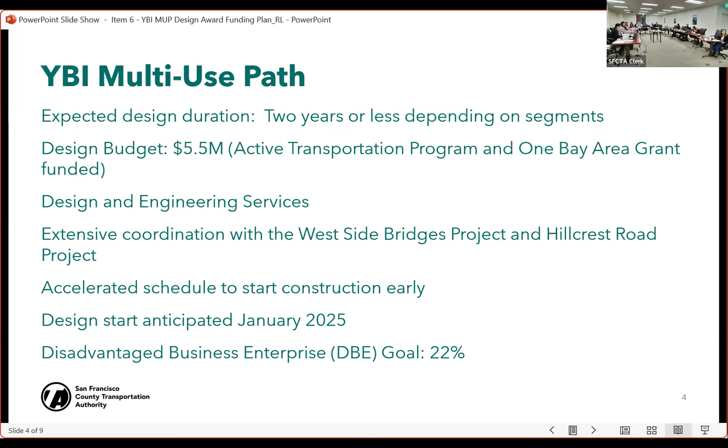Let me just talk a little bit more about the project limit. In the earlier slide, the map, I mentioned that the multi-use path is on the peripheral adjacent to several projects, and here is the actual breakdown.

Segment 1 is from the existing bike landing to Forest Road. That is where the Southgate project is, shown on the top photo rendering. We've got a spiral loop. We may have a different design - it may be a viaduct structure or it may be a switchback. When we get to the design phase, we'll have a better idea. There's a lot of engineering challenges out there that we have to take into consideration.

Segment 2 is from Forest Road to Treasure Island Road. This is where the Hillcrest project is right now, under construction. Segment 3 is along Treasure Island Road, where West Side Bridges is also under construction. Segment 4 is from the West Side Bridge limit to the Macalla Road intersection, and that's the bottom photo - a rendering of what this Class 1 multi-use path can look like.

Let me talk a little bit more about the procurement process. We issued a request for proposals on June 18th this year. By the due date of July 19th, we received 2 proposals. We conducted interviews during the week of August 5th. The RFP allows us to actually award either the whole contract or split the award into different segments.

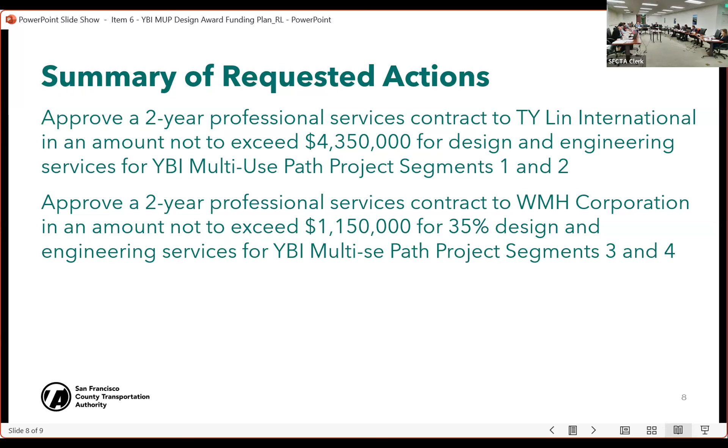We have other projects going on in Yerba Buena Island. Is there any chance you can show the whole project - what's the total budget, how much we've spent, what is the status of construction going on? Throughout the year we see pieces from time to time, but it'll be great to see the whole picture. Projects like the Macalla Road reconstruction, Yerba Buena multi-use path, Forest Road detours - all the transportation improvement projects. It would let us see the whole picture, the total budget, how much we've spent, and how much we plan to spend, so we can understand the whole picture.

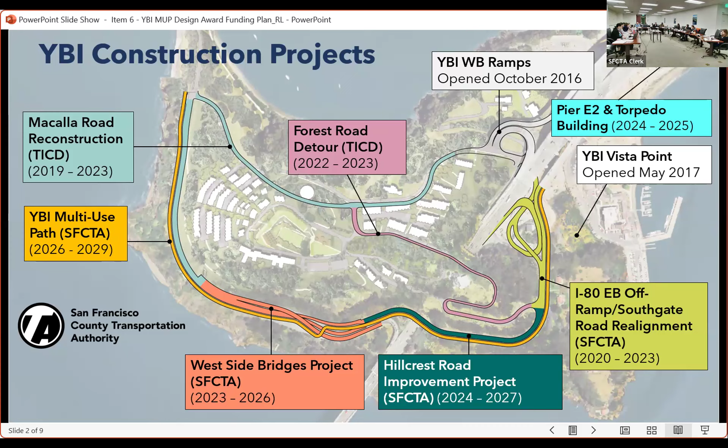Just to recap: yes, this is a Class 1 bike facility, a multi-use path. But more critically, this is a project to truly widen the road in a place that's very hard to build, in order to create that multi-use path and the transit-only lane. It's also a project to build a whole brand new structure that doesn't exist today, making it more user friendly. Did I recap that effectively? Yes. Okay, great, that helps a lot when you put it in that light.

Thank you. So now my second question, which might be for Anna Laporte: I looked at the anticipated funding sources for this, and I think it says $25 million is TBD. So what's the level of confidence that TBD is going to come together?

Thank you for that question. We have several grant applications that are either pending or being written literally right now. We have a pending application for an Active Transportation Program grant, but the funding in that state program has been significantly reduced, such that the $25 million we applied for—we're not as optimistic as we were that we'll secure that funding, because of changes in the budget for that program in this particular cycle.

But we will be applying, for example, for a RAISE grant, and that call for projects should be coming up soon. We're also preparing an application for SB1 Solutions for Congested Corridors for the full Bay Skyway project, including the West Oakland Link, the multi-use path, and ferry components. We also have a pending grant application for RM3 funds, about 23 million total, with about 17 million to be used for this particular project. So there are a lot of applications out there, and we are very confident about the funding for construction.

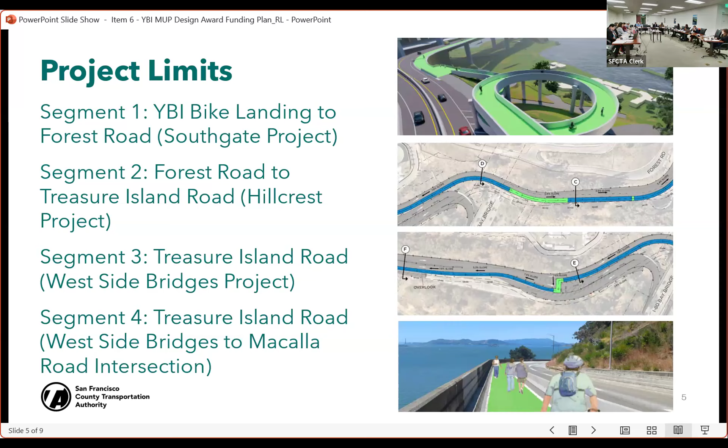Thank you, Edward Mason. I think what needs to be questioned is what is the projected bicycle usage of this? I remember in prior meetings it was said we're going to bicycle ride from Oakland to Treasure Island, over to Yerba Buena Island, and down the other side to catch the ferry into San Francisco. That's what was always said. My question is, how many people are actually going to show up for this, given the cost?

Why are the developers not paying for this? Lennar and the other companies developing there, we're having to pay the freight on this development, whether that's part of the local code to do it. Because when the Navy said, oh, here, we're going to give this to you for free, I remember vividly seeing all the politicians lined up with San Francisco in the background, down there at Building 1, clapping and everything, and not acknowledging the cost we are now incurring for all the infrastructure that is there. So the question is, why are the developers not paying the freight on some of this? It just baffles me as to how we allow this to occur.

Thank you. Is there any remote public comment on this item? Checking for public comments. And there is none. Thank you.

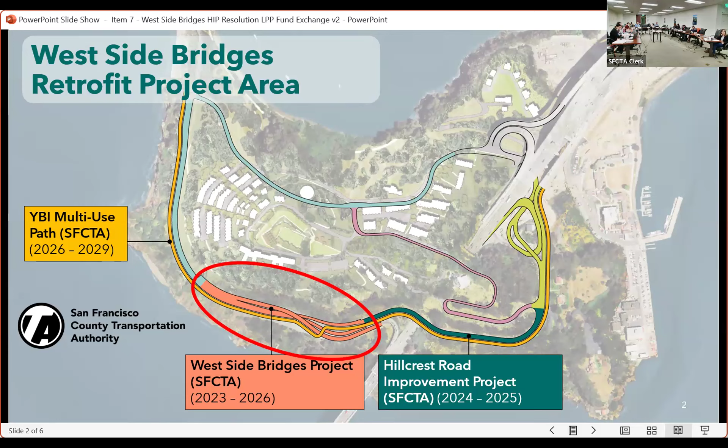Today's actions are continuing our strategy of leveraging construction efficiencies and reducing costs by accommodating the multi-use path through projects already under construction.

If these retaining walls are not constructed now, the West Side Bridges project will construct smaller temporary walls that will need to be demolished by the MUP project in the future, and demolition cost savings alone are estimated at upwards of $10 million.

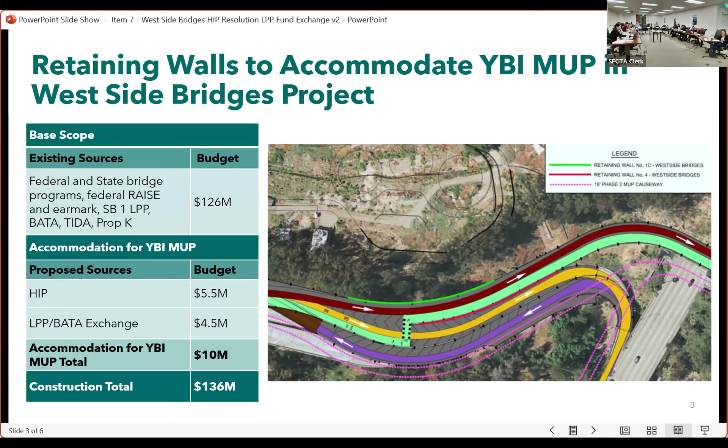5.5 of the 10 million to construct these walls would be funded with regional HIP funds, and the HIP program will be described in the next slide, and the remaining 4.5 would be funded through an exchange of LPP formulaic funds with BATA funds described later in the presentation.

HIP is a competitive race to the top incentive program that awards local jurisdictions for producing or preserving affordable housing. In March of this year, San Francisco was awarded $38.5 million in HIP funds. And this month, the mayor's office submitted a list of recommended projects to MTC that included this 5.5 for West Side Bridges.

MTC requires that localities adopt a board-approved resolution of local support by the time of HIP programming expected in December. We are working to secure funds for these retaining walls as soon as possible so we can execute the change order I mentioned and stay on track without impacting the West Side Bridges construction schedule.

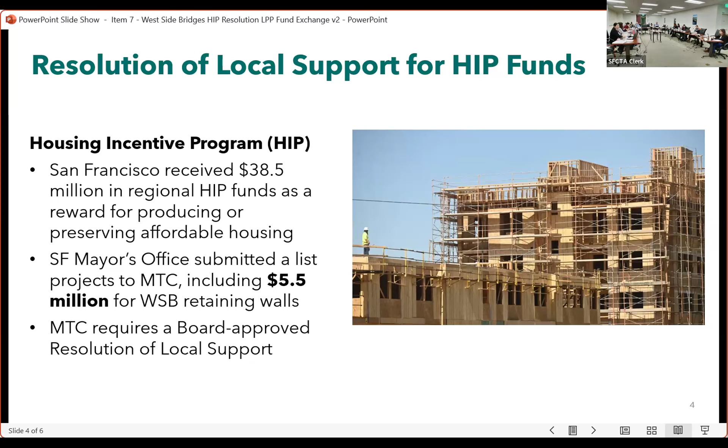So for the next portion of the funds, the 4.5 million, we have identified San Francisco's LPP formulaic funds as the best available source. However, because of program requirements, LPP funds cannot be added to an already awarded construction contract.

As a result, we worked to develop a solution with our partners at BATA, who have an interest in this MUP project because it's part of the larger multimodal Bay Skyway effort in which BATA is a project partner on the West Oakland side.

We are recommending a fund exchange between SFCTA LPP funds and flexible BATA toll funds, with the BATA funds being used on the retaining walls and the LPP funds to be programmed to a project of BATA's choice, likely a Caltrans bridge painting project. Programming of the 4.5 million in LPP funds is conditioned on MTC Commission approval of the 4.5 million in BATA funds for the retaining walls, which is expected in January 2025.

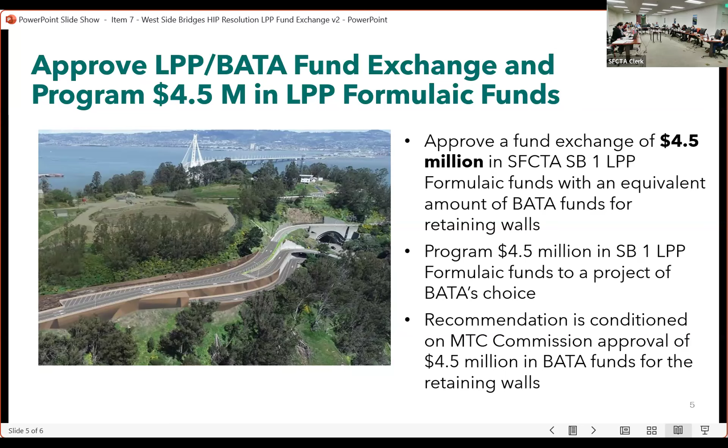The HIP funds, along with the BATA funds, so in total 10 million, would be amended into the West Side Bridges construction contract through a SFCTA board action in early 2025. And with that, we're happy to take any questions.

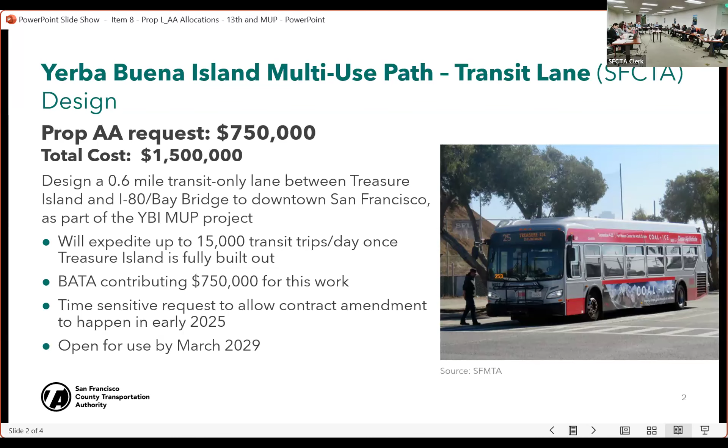Next, we have a second request from SFMTA for $3.35 million in Prop L funds to construct the 13th Street Safety Project. The project includes safety and accessibility improvements, including signal upgrades, protected bikeways, curb modifications, travel lane removal, and repaving on 13th Street and Duboce Avenue.

The Transportation Authority programmed $1 million to the project in 2023. However, costs have increased by $2.7 million due to the complex location under US 101, which requires extensive coordination with Caltrans, construction contract bids that came in over the engineer's estimate, and construction support costs, particularly for traffic routing and security, that are higher than originally anticipated.

SFMTA was able to identify funds to cover some of the cost increase. However, lower than expected revenues from other sources have led to SFMTA's need to request an additional $2.35 million from Prop L beyond the $1 million already programmed, which would be reprogrammed through a 5YPP amendment from a placeholder for implementation of recommendations from the biking and rolling plan.

This request is seeking a waiver of Prop L policy that funds will be allocated prior to advertising a contract necessitating expenditure of Prop L funds. It is time sensitive because SFMTA must award the contract by December in order to meet requirements of the state LPP grant that the project received. And after contract award and construction, the project is scheduled to be open for use by the end of 2026.

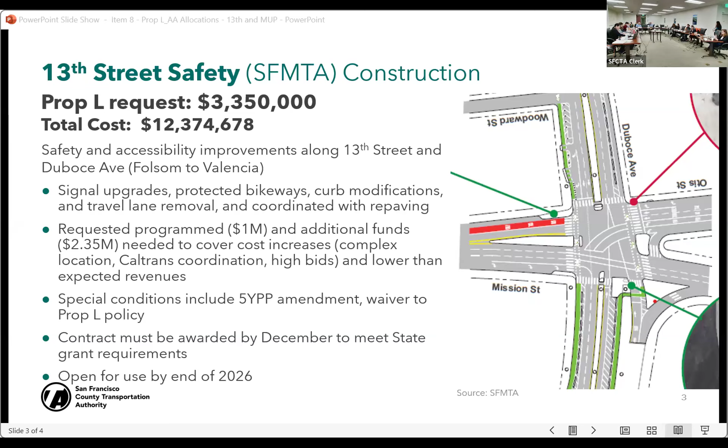Item 9 is to approve a motion, adopt a motion of support to allocate $2.6 million and appropriate $139,000 in Prop L funds with conditions for 2 requests. This is an action item. Linda Beret, Transportation Planner, and Alex Pan, Transportation Planner, will be giving this presentation.

Hello, good evening. This presentation includes 2 Prop L requests. The first request is for the bus transit signal priority signal equipment, for 2.6 million for the construction phase of the project.

This project will upgrade and replace existing bus transit signal priority related devices, including radios, controller equipment, network equipment, and CCTV equipment that's nearing the end of its useful life. Funds will also be used for network optimization at intersections already equipped with the bus transit signal priority radios and antennas. The new equipment to be purchased includes bus transit signal priority intersection equipment, traffic signal controller equipment, and networking equipment.

The project benefits include improved transit performance, updated traffic signal timing to latest standards, remote monitoring, and repair and replacement of network equipment. The transit signal priority is used to extend green lights or to bring up green lights earlier to prioritize transit vehicles approaching the intersection. It improves the odds that a transit vehicle sees a green light or gets a shorter red light, thus reducing delays and improving transit reliability and travel times.

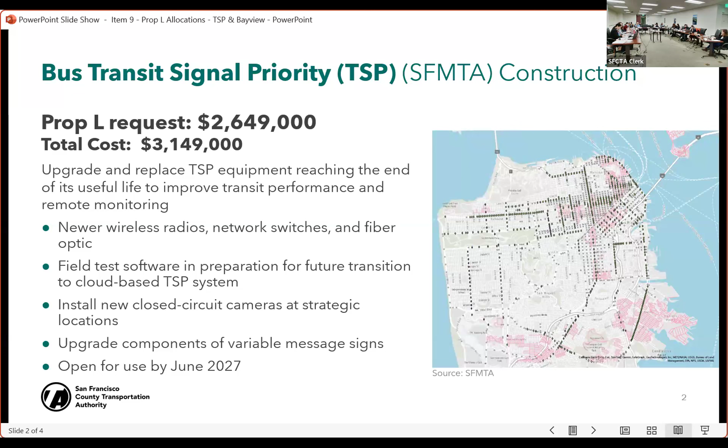My colleague Alex will be presenting the next Prop L request. Good evening, CAC members. I'm Alex Pan, a transportation planner at the San Francisco County Transportation Authority. This request is for

$139,890 in Prop L funds for grant match for the Bayview Street Safety and Truck Relief Study. We have received a $525,000 Caltrans Sustainable Transportation Planning Grant to advance the recommendation in the Connect SF Streets and Freeway Strategy. The study will develop recommendations to improve freight circulation and safety in the Bayview neighborhood, as well as establish guidance for strategy applications that can be used in other city, regional, and state freight planning efforts.

Recommended improvements will include safety improvements to reduce conflicts between large vehicles and other road users, and policies and programs to increase the adoption of low and zero emission delivery vehicles. As part of the study, we will conduct public and stakeholder engagement and establish a technical advisory committee, which will have representatives from the goods movement sector.

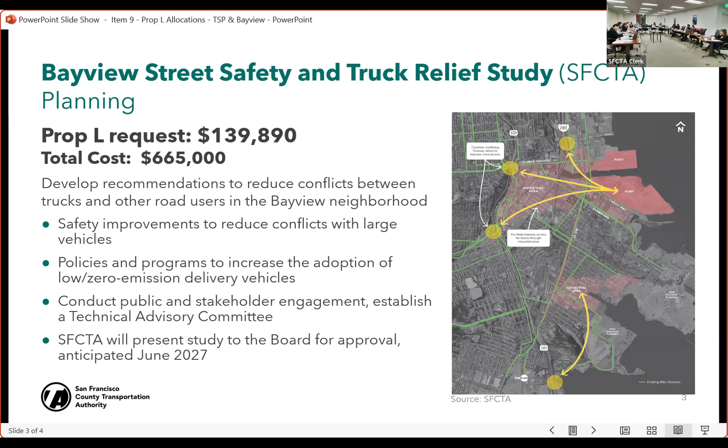We will begin the study this winter and expect to complete it and bring final recommendations to the board in June 2027. With that, we are able to answer questions, and we also have the project manager for the bus transit signal priority online. Great, thanks so much for the presentation.

Member Kim? Thank you, Chair. Thank you for the presentation. I have a question about TSP. Recently I saw a newspaper talking about 212 million for an up-to-date train control system, part of a total 700 million Muni Metro control system. Is the TSP part of that whole system upgrade plan? My question is, is there any interference between the two different systems, if not separate? I know train control is about the subway, but we have a lot of streetcars. So if operating the same system, bus and streetcar, are those systems working together or separate? That's my question.

Thank you for that question. I believe we have MTA on the line, and I invite Liliana to respond. Yes, hi, good evening everyone. I'm Liliana Ventura, program manager for the Intelligent Transportation System at SFMTA.

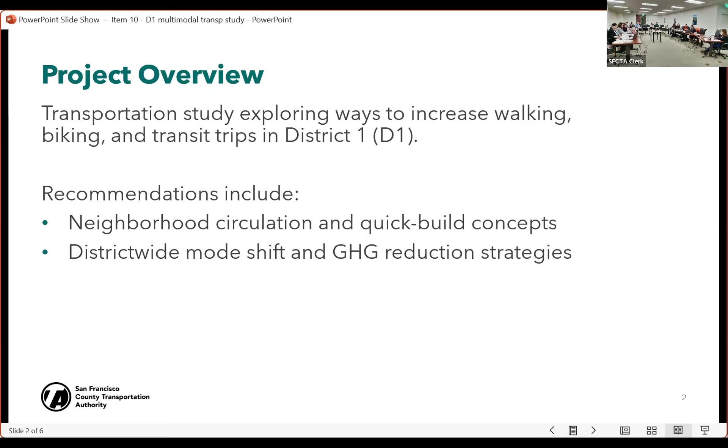This study was requested by Commissioner Chan and is funded through the Transportation Authority's Neighborhood Program. We are focused on resident trip making to develop concepts for near-term safety and neighborhood connectivity improvements, and then long-term concepts that support longer-term mode shift and greenhouse gas reductions within District 1.

We did two rounds of outreach consisting of surveys, pop-ups, town halls, and meetings with community groups. The first round helped us identify needs, priorities, and focus corridors for improvements, and the second round helped guide refinements to the draft concepts that we brought to the public.

I'm going to touch on the 7 concepts briefly. They're very consistent with what was presented in February. So these 7 concepts span the entire district.

The first is on Geary, and this is to improve transit stops along the corridor with transit amenities, lighting improvements, and travel info to address personal security concerns that were raised during outreach.

The next improvement is on Cabrillo. This is the full corridor, to upgrade the existing bike lane with green paint and conflict markings and also bring safety improvements to intersections. Then we have Balboa.

This is the inner Richmond portion, from Park Presidio to Arguello, having a boarding island, transit boarding platform, and amenities at 6th and Balboa and safety improvements at the intersections.

And then for Fulton Street, there's two improvements. The first was revised based on community feedback, so the extents have changed. They are now longer, going from Arguello to 48th. Originally we stopped at 22nd and just did 22nd to 48th.

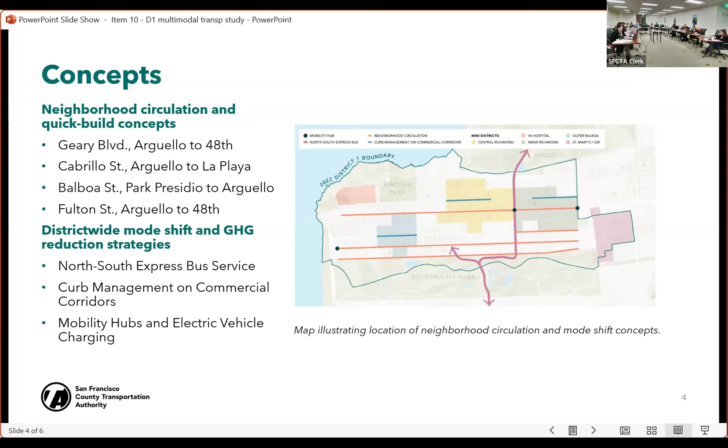The plan includes an implementation plan, and this includes planning level cost estimates, potential funding sources, which includes grant opportunities, and next steps for detailed design.

We're also, for the Fulton concept, I want to touch on that in a little bit more detail. So there's 2 possible designs for the median islands, and the nature of the corridor is very complex. There's a lot of competing uses that make up Fulton. So the design will be further developed in coordination with SFMTA.

And the implementation plan is to test the designs at up to 3 locations along the corridor. The pilot will be assessing transit operations, safety, and vehicle speed impacts. And the findings from that pilot will be used to make any adjustments to the design before implementation. With that, I can take any questions.

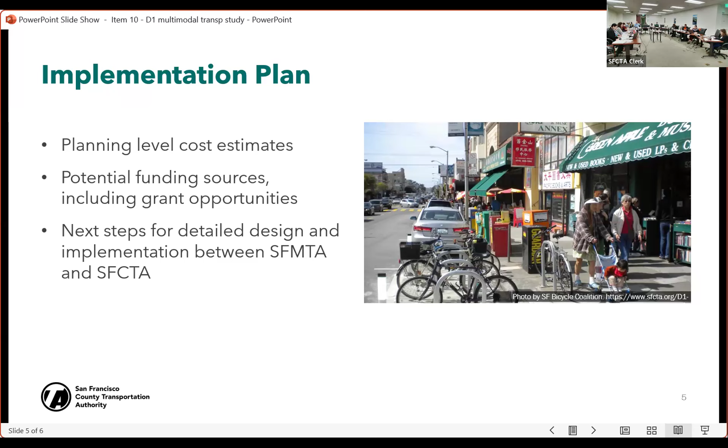Thank you for the presentation. Member Kim? Yeah, thank you, Chair, and thank you for the presentation. Actually, there's a 90-page detailed study. It took me like half a day. Thank you for this, the District 1 main issue nowadays is Fulton.

It's kind of become a speedway, so it's really dangerous for pedestrians, bikers, even car drivers. Some crazy people speed up. So this report covers a lot of strengthening safety stuff. So I appreciate those things.

And then I have a little question. It mentioned Fulton speedway at 30 mile per hour, but recently it was changed to 25 mile per hour. So I think this needs to be updated. This report mentions a higher speed limit, but it's already been reduced, so that needs to be updated.

And then I have a question: what are the Lander bus stop signs? Could you explain? It says some of the, update bus shelter, it says Lander bus stop signs. And then pedestrian scale lighting.

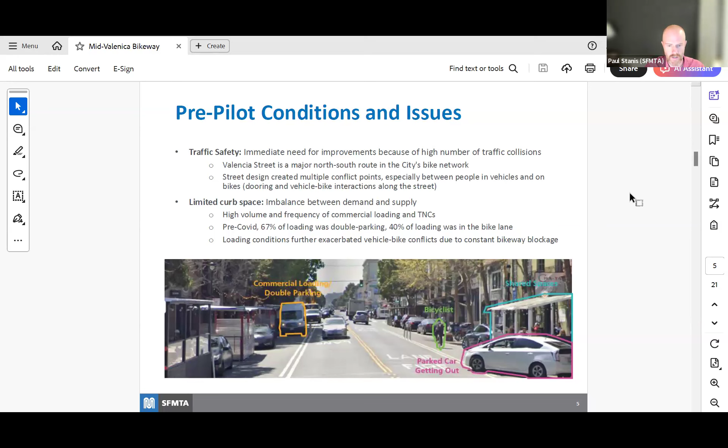So riding a bike on Valencia wasn't great, but a lot of people did it because it was the best option riding through the Mission. You have a direct connection from Cesar Chavez and area south, right through Valencia, right into Market Street, and connections to the Wiggle and the Panhandle. So it's a very important street on our bike network, and we've seen about 3,500 cyclists per day ride down Valencia.

When we were originally thinking about trying to construct some sort of upgraded bikeway on Valencia, it was right before COVID, and we thought we were going to do a curbside bike lane. COVID happened, we had to put the project on hold, and when we came back, we realized that the characteristics of the street had really changed.

A few years ago, there were about 70 parklets up and down this 8-block stretch between 15th and 23rd. Doing a side-running bikeway would have been really challenging. You would have had to slalom the bikeway from the curb around the parklets and back to the curb. That would have been very challenging for cyclists, and it also would have removed a lot of parking and loading.

So when we picked up the project a couple of years ago, we realized that we needed to think a little bit differently on Valencia, the way things had changed. And we settled on a Center Running Bikeway because it preserved the outdoor dining spaces that were really important for businesses, maintained a lot of the parking and loading up and down the corridor, but also provided a protected bikeway for people who are riding bikes.

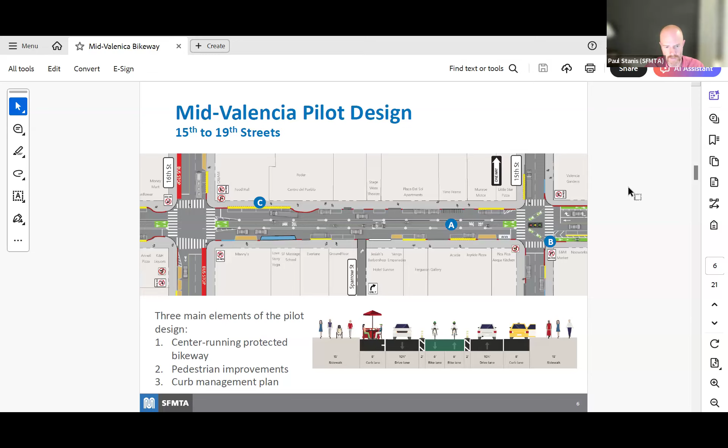So we did a Center Running Bikeway, and we heard a lot about it - initially very mixed reviews. Some people said yes, it actually provides a better facility for me to ride my bike; you can see the roadway a little bit better. It also exposed people to a very startling scenario where emergency vehicles, or people riding ATVs or dirt bikes, would use that center running bikeway to travel very quickly.

We heard extensively that businesses were still trying to recover from COVID, and there was an impression that the bikeway was driving people away. Some of the things we heard was that it was a confusing layout - motorists did not exactly understand the turn restrictions, where to park, how to navigate around Valencia, and there was a lot of confusion about where they could actually park. Even though we tried to maintain as many parking and loading spaces as possible, we still did reduce some of them, so there are actually fewer spaces along the corridor.

One thing we did notice was that people were not parking in the bikeway as much - the frequency and number of double parking instances was significantly reduced, as I'll show a little bit later from our evaluation. And then finally, we heard a lot from folks to either change the street back to how it was pre-COVID with the Class 2 bikeway, or just remove the bikeway off of Valencia altogether. We are not going to do that. We are not entertaining that idea at all.

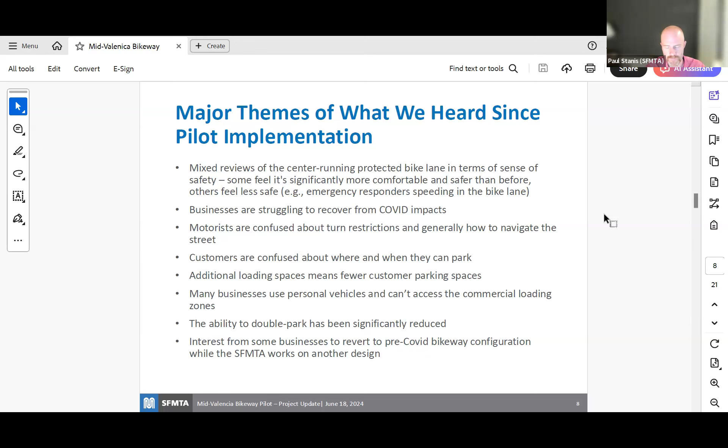So we heard a lot. We have spoken with over 100 businesses up and down the corridor, which is more than half of the businesses on the 8-block stretch. So we did a lot, and we tried to make parking and loading much simpler.

When we implemented the Center Running Bikeway, we had parking kiosks where you would get out of your car and pay at a single pay station - one pay station might serve the spots where 8 or 9 vehicles parked, and that was confusing for some people. So we put all of the single space meters back and included decals on the back of them that made it very clear what type of vehicle could park at what time.

We wanted to reinforce that there were no left turns and U-turns along the corridor, so we put up additional signage. And we also wanted to advertise that there is plenty of parking on Valencia. There happen to be 2 SFMTA garages off of Valencia that most times of the day have parking available, and in some cases are actually cheaper than street parking.

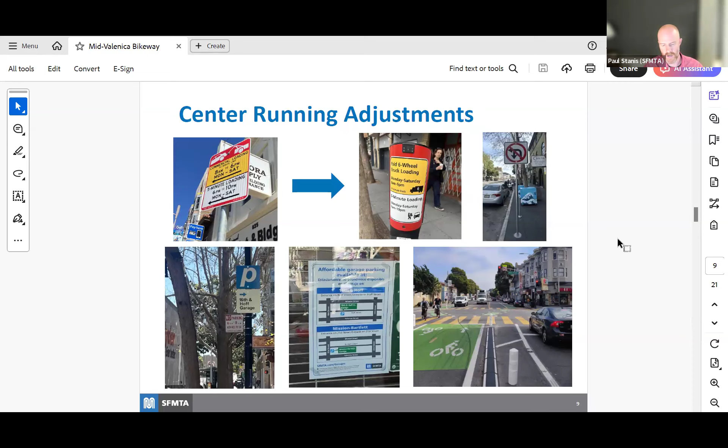And then finally, we tinkered with some of the signals at 15th and 23rd, and those are the 2 intersections where the center running bikeway goes to the side of the street. So we just kind of tightened up some of the slack on those 2 signal timing patterns because we wanted to make sure that congestion was not becoming too much of an issue at those locations.

So we have been evaluating this project a lot because it is a new thing for San Francisco, and we wanted to see how people were reacting to it. We actually measured a lot of different metrics at the 1-month, 3-month, 6-month, and 12-month marks. So we have a whole suite of information.

At the 3 and 6-month marks, we noticed that the average daily vehicle volume was down by about a quarter. The average daily bicycle volume was about the same. Vehicle left turns and U-turns are about 1% of through volume per hour, which is lower than what it was before, but 1% is still not 0. And then we saw that double parking was still occurring, but instead of that 67%, it was down to 13 or 14%. And of that 13 or 14%, only 1/10 of 1% was actually happening in the bikeway.

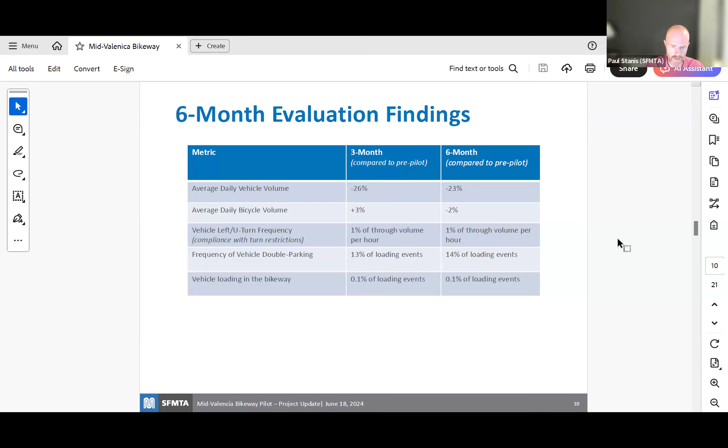So that is one way to measure the effectiveness of a project, but I think the statistic that people may be most interested in is the collision rate. So there was a lot of interest in this a few months after the project was completed. We did see an initial spike in collisions on the corridor. We saw a jump from 2.4 collisions per month up to 3.7.

As time has gone on, that rate has gone down each time we're measuring metrics for the corridor. And I can tell you that we just got our 12-month crash data back, and the 12-month crash data is very close to the pre-pilot data as well. So that 2.4 crash rate is very similar to what we're seeing at the 12-month mark.

This is really common on some of the projects where we introduce a new bike facility or an upgraded bike facility. In fact, this segment of Valencia from 15th to Market Street that has a side running curbside bikeway has a very similar crash pattern. It went up a little bit in the first few months and then slowly went down as time went on.

We've seen some interesting things happen with our bike and scooter involved crash rates and our pedestrian involved crash rates. So bike and scooter crash rates are basically the same as pre-pilot. We did a deeper dive into this, and we've seen that actually scooter related crashes have gone up and bike related crash rates have actually been about the same, with a slight decrease from pre-pilot conditions.

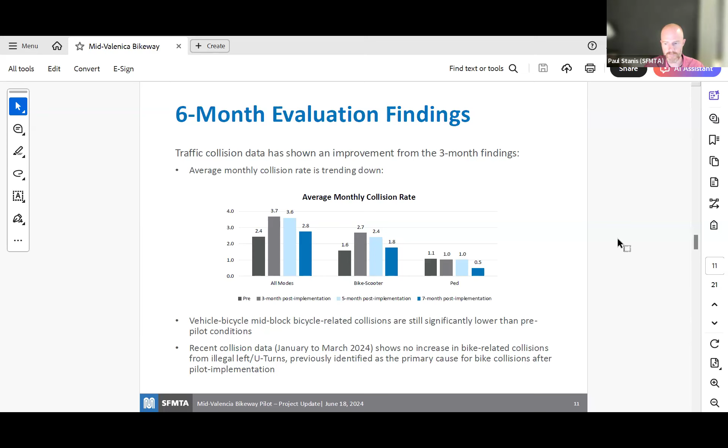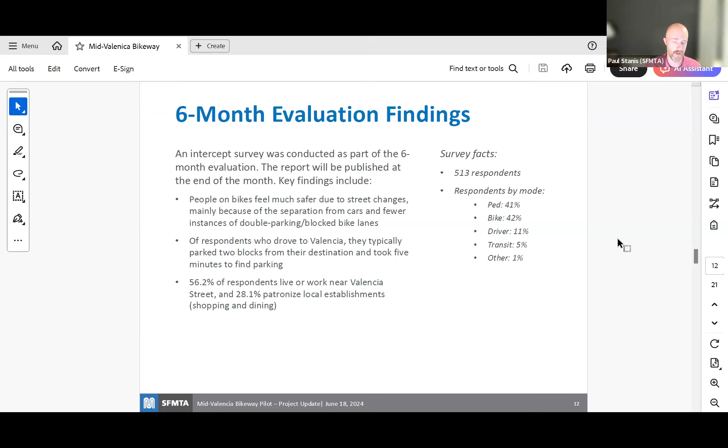Okay, so we evaluated a lot.

There was a strong movement to change the center running bikeway and look into a side running option. So at the beginning of the year, the SFMTA board directed the project team to start looking into a side running bikeway option, and that's what we've been doing all year. In June, they decided to endorse a side running bikeway design, giving us the authority to start taking the design from a concept to a final design. That's what we've been doing for the past 4 months.

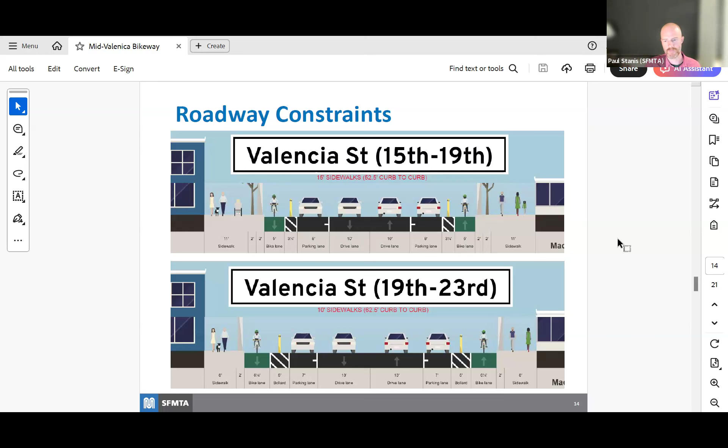We have been very busy with outreach. Like I mentioned earlier, we've met with over 100 businesses up and down the corridor. In the spring, we held some mini open houses, taking groups of folks in 2-block sections and showing them a conceptual design, saying this is what the street looks like now, and this is what your block could look like under a side running option. We got a lot of input on that.

We were very clear that a side running option means a few things. It means you would lose more parking and loading. It means you could have a side running bikeway. It means we have to consider a lot of how the street functions. We've been busy showing up at merchants meetings, demonstrating a few products that might be new to Valencia, and we've gone to Sunday Streets and Bike to Wherever Day.

About a month ago, we held 2 open houses where we showed the final designs to the community. We invited residents, merchants, advocates, anyone who had an interest on Valencia, to see the final designs and share their opinions. We were there to answer questions, to make sure we were getting the word out on the final option and what your frontage may look like if you live, work, or visit Valencia.

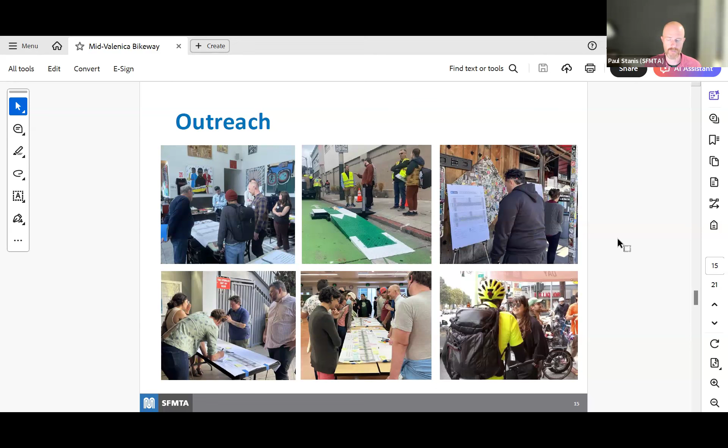One of the things we heard a lot of questions about was this idea of a floating parklet. We introduced this idea to parklet owners up and down Valencia in the spring, and said to them, we may have a few options for parklets if we pursue a side running bikeway design. And these, like everything else, have trade-offs.

Previously, there were 70 parklets up and down Valencia. Now there are about 26. We talked to all of those 26 owners and said, if you have a curbside parklet and you want to keep it there, that's totally okay, but it would mean we'd remove parking on either side, because we'd have to transition the bikeway from the sidewalk around the backside of the parklet and back to the sidewalk. If you're interested in a floating parklet, we could squeeze in parking and loading on either side of it. So we offered those options to folks.

We also did our own homework. We talked to Oakland and New York City—they've had floating parklets for a number of years. We talked to them about what works and what doesn't, then took the best ideas from those 2 cities and incorporated them into our preferred option in San Francisco.

So when it all came down to it, of those 26 parklet owners, 21 wanted to remain curbside. 2 wanted to remove their parklet altogether—just tear it down, saying I don't use it, it's becoming a maintenance issue. And 3 were interested in moving to a floating parklet position. We talked them through the process, let them know what they're going to have to do, and we've been working very closely with them.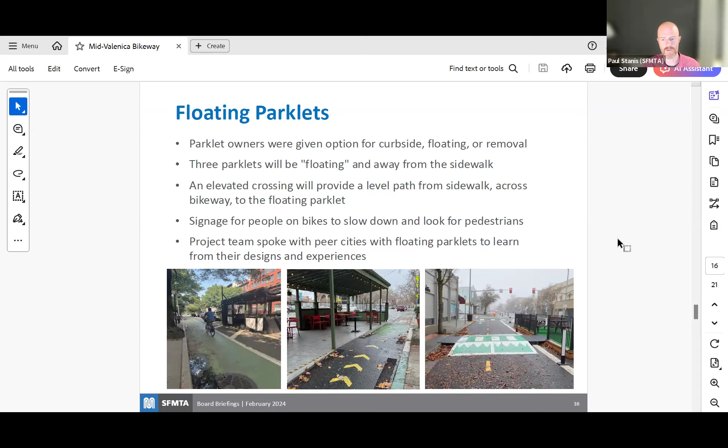Like I mentioned before, the design for a side running curbside bikeway is very complex. There are many trade-offs. We've been working very closely with businesses, advocates, merchant groups, community groups, and emergency services.

The parking and loading mix is very block and business specific. So once again, we've been very closely working with VCMA, the Valencia Corridor Merchants Association, to understand their parking and loading needs as they see them, and revising our design based on their input.

Every inch of the corridor has been considered. Where we can fit in vehicle parking and loading, we're doing that. If there's a little leftover space, maybe we can fit in a few scooter or motorcycle parking spaces. We've heard that's very helpful because there's an increase in DoorDash, Uber Eats, and delivery drivers using scooters, so we want to accommodate them as well.

Something we've heard from VCMA is it would really be nice to have landscaping along the corridor. So we've been working closely with them and landscape architects at Public Works to introduce the idea of planters and plants. We're going through that process now.

We've also added a lot of blue zones up and down the corridor, trying to get more in compliance with our ADA and ProWAG guidelines. We are adding more blue zones up and down the corridor and on side streets as well.

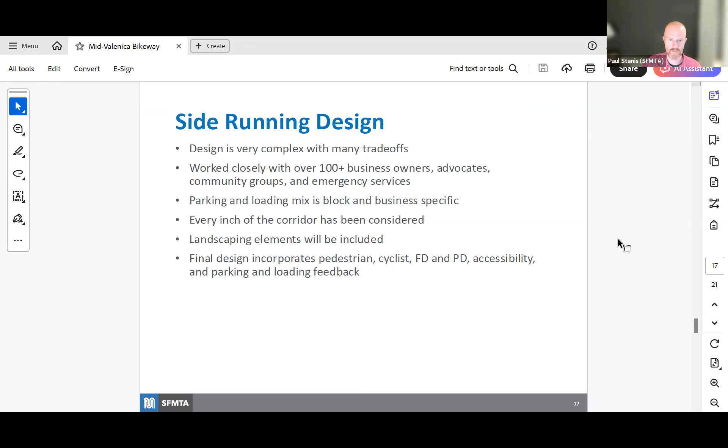The final design really does incorporate a lot of input from fire and police, pedestrians and cyclists, and accessibility, and all the feedback we've gotten from all of those interested parties.

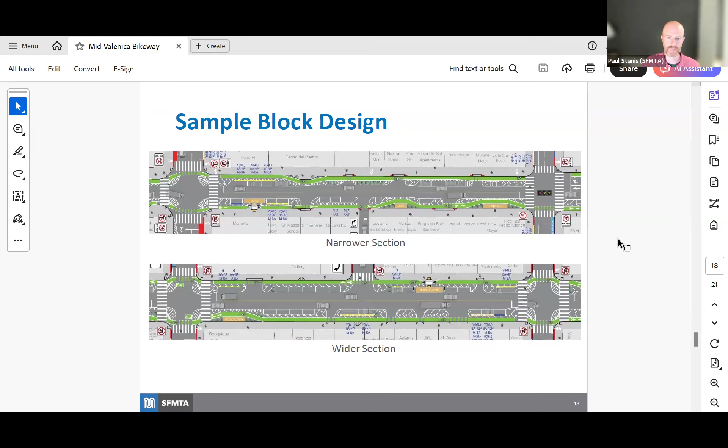So where are we and where are we headed? Our goal is to go to our board next month — we're eyeing November 19th. That's when we hope to present the project, get input from our board, have public comment, and then hopefully get approval and move toward construction. We think construction will probably last two to three months, but that's really weather dependent. Because it's the wet, cold, rainy season, we're flagging that for folks and letting them know construction could take a little longer than anticipated — it really depends on what kind of winter we have.

We're doing a lot to keep the community informed. We've set up working groups inviting representatives from the Merchants Bike Coalition, residents, and independent merchants to talk about implementation. Because we heard a lot last time about frustration and confusion — people not knowing if it was completed or where you could ride your bike — we're trying to avoid that this time. We've held two of those meetings so far, mainly as listening sessions sharing information about how we think implementation will go. Now that we have the final design, we're going to work more closely with our shops to understand how implementation could go.

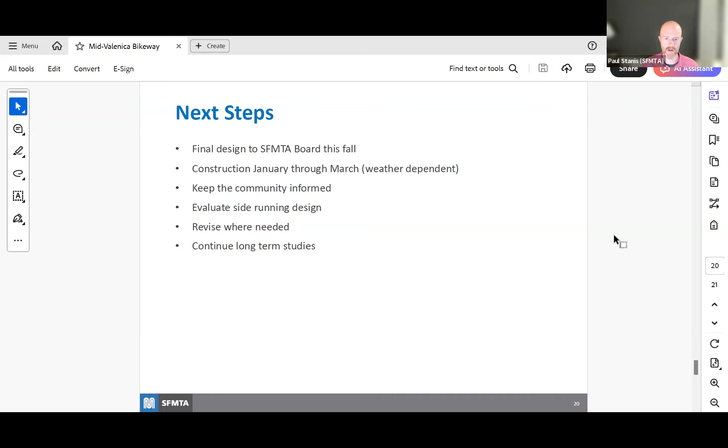We're going to revise where we need to once the project is complete. If there's a change needed with parking and loading, or a little tweak with the bikeway design, that's what we'll do. In the background, we have long-term studies looking at options for traffic and circulation, curbside management, and placemaking. Those are all continuing in the background and should be ready sometime next spring, hopefully.

So that's all that I had for tonight. I'm sure there are questions. So I'm here to answer whatever you may want to ask.

Thank you so much for the presentation. Member Ortega? Hi, yeah, I'll try to keep this short since it's already really late. First I wanted to thank you for the presentation. I think it's really helpful.

There's one comment, one more of a question. The first comment is that I was informed about the open houses, and I think that's wonderful, except for the fact that they were from 4 to 6 p.m., which meant that quite a few people I know that wanted to go couldn't because they were either at work or had to try to get there in time.

I think this is something I brought up to SFMTA before. This isn't really for you to comment on. I just really want to keep bringing it up to SFMTA and to the CTA that when you have public outreach events, you need to make sure people that live in the neighborhood but may be working outside the area can attend. My partner uses the Valencia bike lane every single day and really wanted to go, but he had to work and couldn't make it to the Valencia bike lane meetings to give his comments.